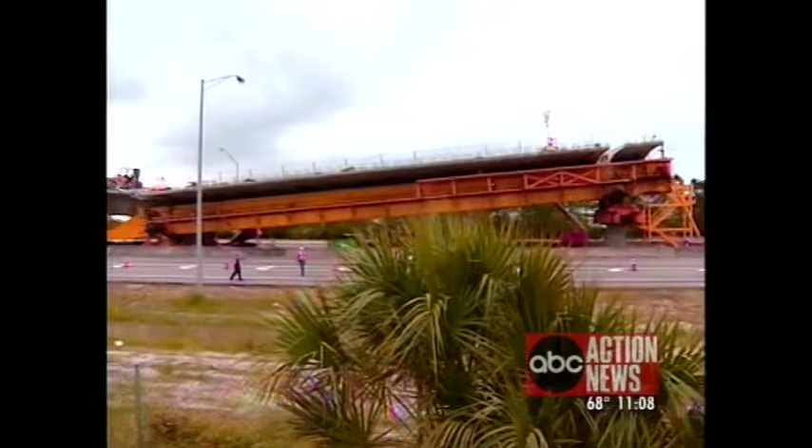The Action News investigators have learned top expressway managers failed to act after their own engineers discovered signs of a sinkhole more than a year ago. Well, tonight we unravel part of the mystery behind the Crosstown collapse. When the collapse of the Crosstown sent tons of concrete and iron crashing down, no one was badly hurt. But the accident shattered the confidence of many commuters. It looks bad. I don't know if I ever want to ride on that bridge.

Within hours of the accident, expressway officials blamed the collapse of Pier 97 on a mysterious sinkhole, an act of God they claimed impossible to predict. I don't know what to call it. I don't like to call it an act of God. But our investigation found that a sinkhole may have been growing there all along, and expressway officials knew about it. Our review of hundreds of engineering documents and field notes tell the real story.

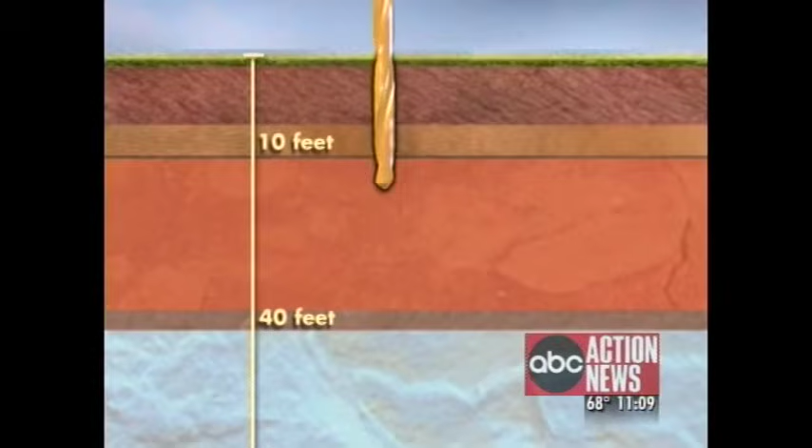Last year, engineers took a soil sample drilling 40 feet underground. They discovered signs of a sinkhole under the area that would support Pier 98, one pier away from the collapse. If it shows soft material there, it would be a concern. Bill McDaniel is the construction manager on the Crosstown project. Records show his engineers reported signs of a sinkhole in their field notes and added reinforcements to Pier 98. But they did nothing to shore up the adjacent piers, including the one that collapsed.

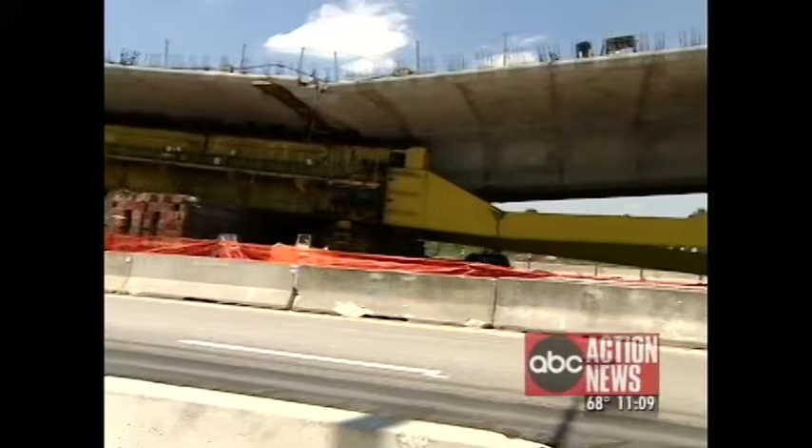McDaniel says he hadn't heard about any of this. I haven't had that brought to my attention. I haven't looked at any of these boring logs or such. I've let the geotech folks review those, bring them to us. They're expert in this area. I'm not. So we had our own experts take a look at the records. Jeff Ellis is an independent environmental engineer who believes expressway officials dropped the ball.

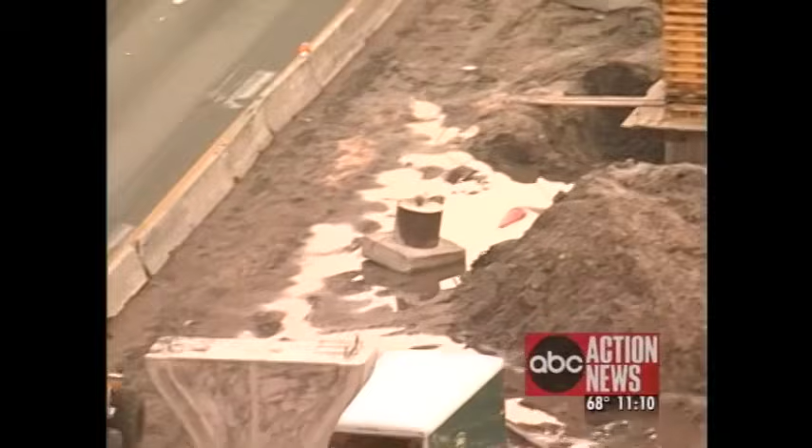If I found a small void like that, I probably would have done some additional testing in the area of this pier. But McDaniel never ordered any additional testing. Crews went ahead constructing Pier 97 with no additional reinforcements. Ellis says it's possible the sinkhole under Pier 98 could have grown, swallowing Pier 97. That could be like a small part of the sinkhole. This soft zone or void could grow into a much larger zone once you move away from this particular spot

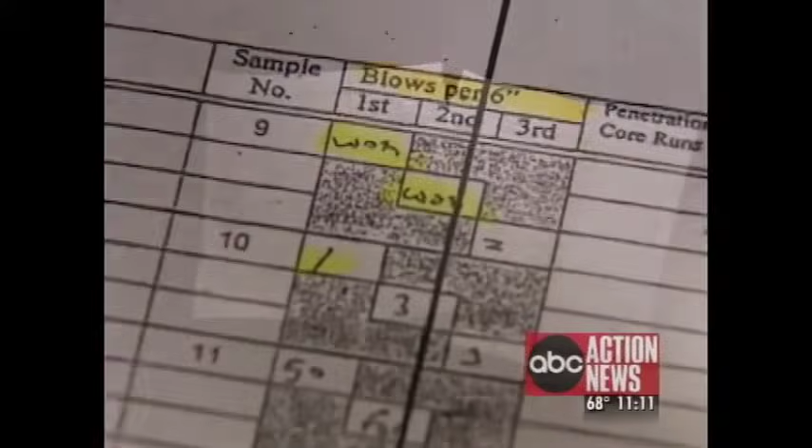the boring was done. Expressway officials admit what we uncovered should have raised red flags a long time ago, but they will not confirm that the sinkhole discovered last year and then ignored could have caused last month's collapse. In the next couple of weeks, the Expressway Authority will conduct soil tests around Pier 97 and 98 to check for more sinkholes. They've decided not to test additional piers on either side because they say that would just be too costly.

Well, tonight, the Action News investigators dug deep on a story that affects thousands of local commuters and taxpayers. Last September, our Mike Mason was the first to report structural problems with the Crosstown Expressway project. Then in April, 7 months after Mike's report, a portion of that expressway collapsed. Before Mike brings us tonight's developments, let's take you back to where it all began.

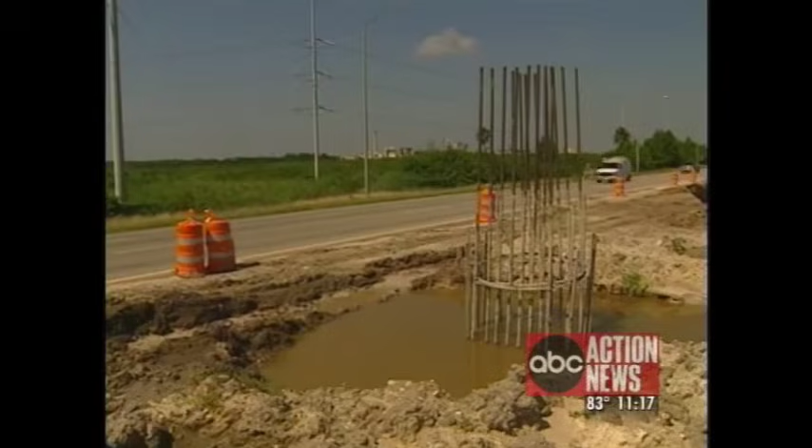September 12th, 2003, an Action News exclusive. We uncover major mistakes in the construction of piers built for the new Crosstown Expressway. Steel rods designed to support the pier were incorrectly measured, leaving the concrete weak in some areas. Expressway officials fired 4 inspectors, including this man, Mark Delashaw. This clearly was careless. I thought it was absolutely a good decision to fire the people involved.

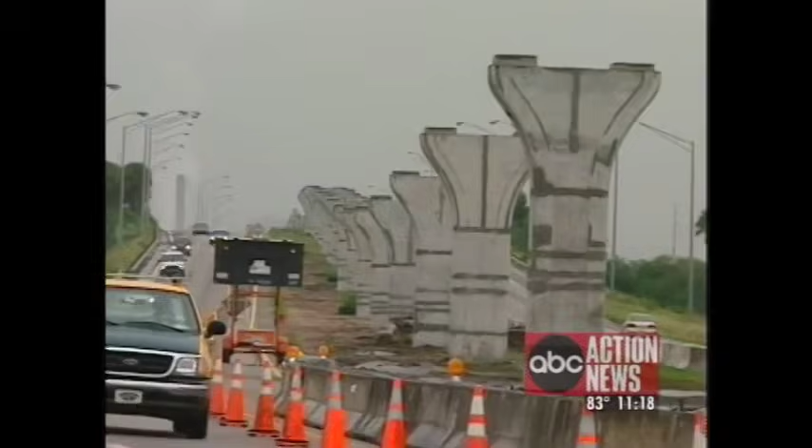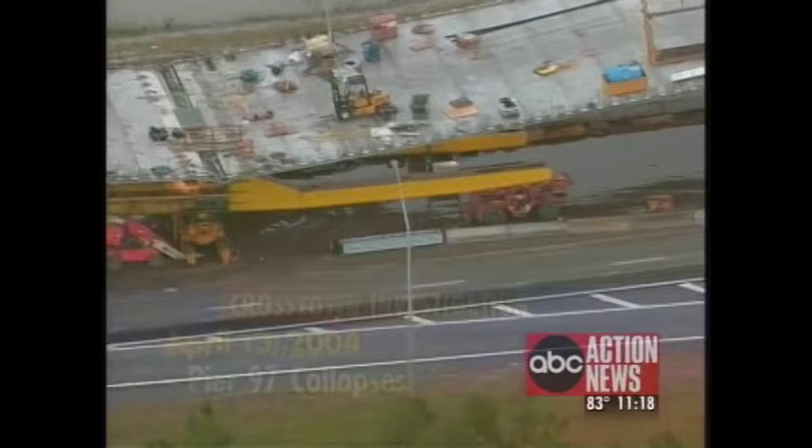In September, company officials downplayed the mistakes, insisting the piers were structurally sound. You're going to guarantee that these are going to be safe? We're very comfortable that these are safe columns. 7 months later, on April 13th, 2004, Pier 97 collapsed. Within hours, expressway officials blamed a sinkhole, dismissing any notion that a structural defect might have caused the pier to collapse. One of our piers actually broke through and entered into a sinkhole.

Well, tonight we have even more evidence questioning the sinkhole theory. In fact, our investigation reveals the same crew of men fired by the Expressway Authority for careless work had their hands all over Pier 97, and they made some serious mistakes while building it. Mike Mason is here now with details. Mike, what'd you find? Well, you know, a lot of people want to know what happened, but at this point, there's really no official cause.

Expressway officials want all of us to believe that a sinkhole swallowed Pier 97, but after months of sophisticated testing, expressway officials have been unable to prove that theory. So now the spotlight is shifting to the structural integrity of those piers and the qualifications of the people who built them.

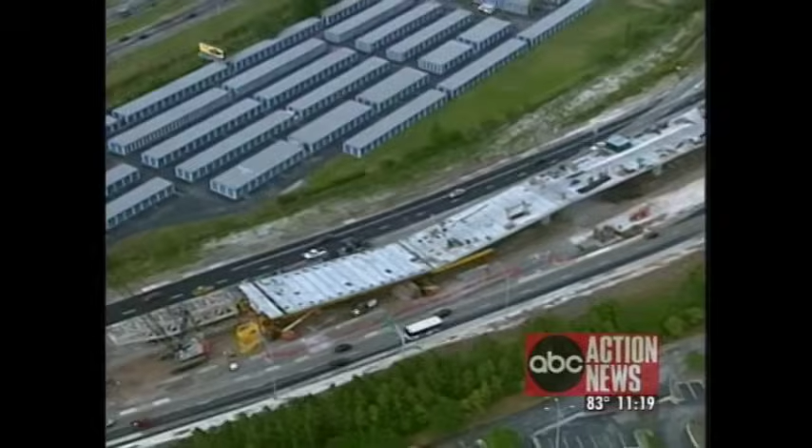The Expressway Authority says it won't really know what happened to Pier 97 until they pull it out of the ground. But while they wait, we've been digging through records, finding evidence of problems with how the pier was constructed. Last summer, construction company URS began digging a hole for Pier 97's foundation, or shaft. Records show it didn't take long before the shaft began to get crooked.

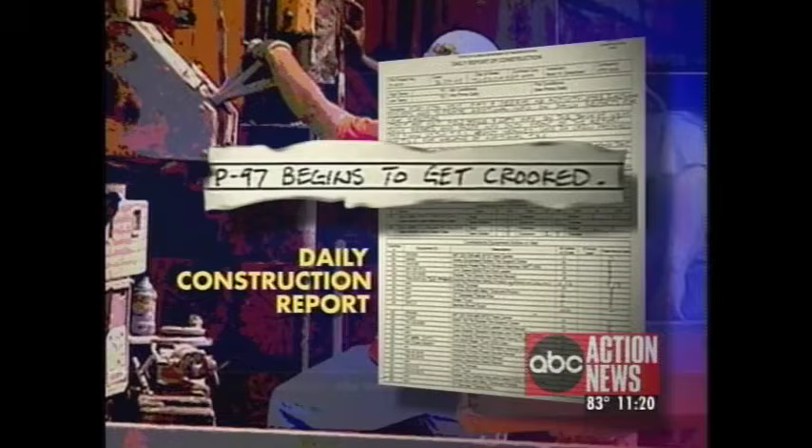Independent engineer Joe Robinson says that could cause major weaknesses in the bridge's support. And the shaft is supposed to be 90 degrees straight down by design, and you have it crooked, then you're not going to have the strength in that pier as you would if it was constructed properly. Workers at URS say they straightened out the shaft, but there's no way to know exactly what they did to straighten it out, or if they even did any work at all. That's because there are no reports of the repairs to back it up.

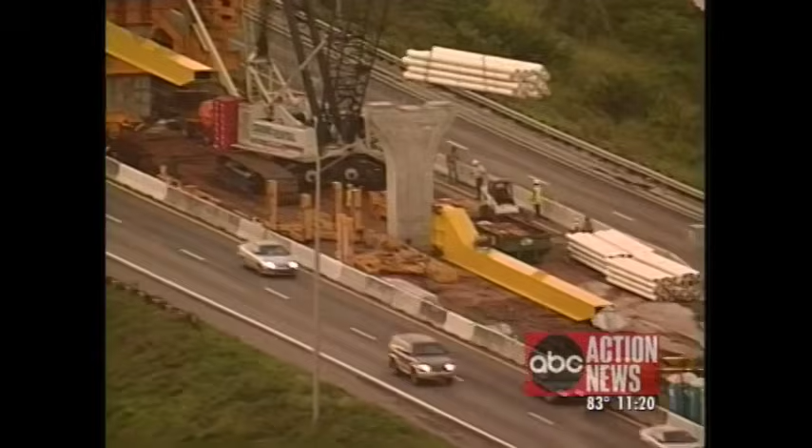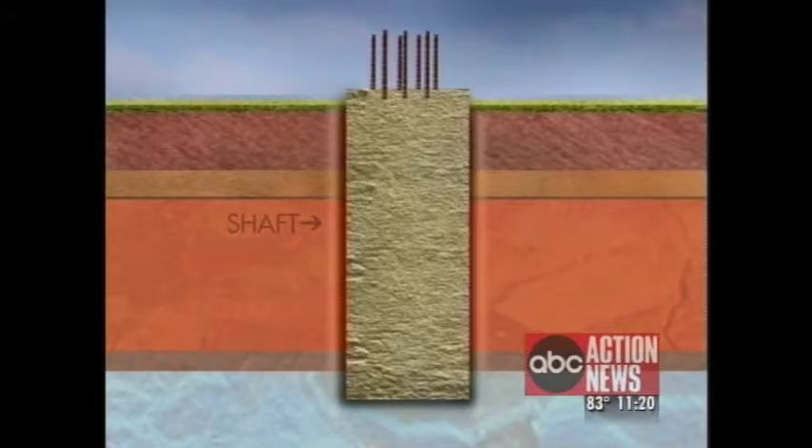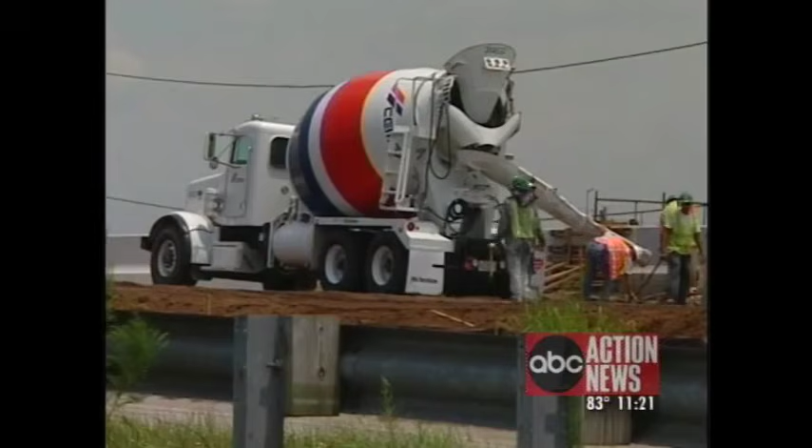We also discovered when workers poured the concrete for the foundation, they had to pour in a lot more than anyone expected. It made us wonder, was the shaft still crooked, requiring more concrete to fill it up? So how much concrete are we really talking about here? Well, it's 6 cubic yards, and this is what 6 cubic yards looks like. It's enough to fill 27 of these wheelbarrows. So the question now is, where did all that concrete go? URS says overpouring concrete is common practice, but our independent engineer says 6 cubic yards is way too much.

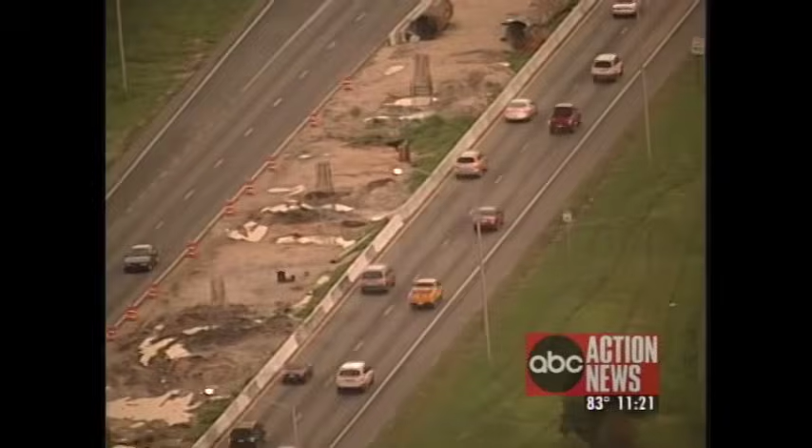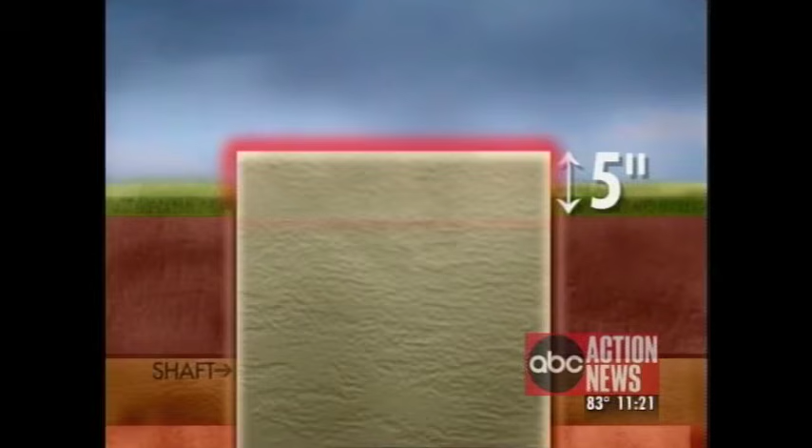And we found yet another problem. After the concrete was poured, URS workers realized they had built the shaft 5 inches too high. Just a few inches off and the whole project could be compromised. The company claims it fixed the shaft, but again, we can't tell you what they actually did because nobody kept any repair records. Engineer Joe Robinson says that's a big problem. And it should be reviewed by an engineer. If you're wondering why repair records are not being kept at such a huge construction project, well, so are we.

The contract URS signed with the Expressway Authority requires them to keep a written record of all deficiencies noted in the work of the contractors, and they must document the corrective action that was taken. URS's local vice president, Bill McDaniel, refused to explain why records of the mistakes made on the shaft were never kept. Instead, McDaniel told us to talk to the Expressway Authority. They had us speak with their consultant, Harold Aldrich. Aldrich says we're making a big deal out of nothing. There's absolutely nothing that would suggest that anything you're asking about had anything to do with this pier falling down. This is a wild goose chase, Mike.

Aldrich may call it a wild goose chase, but our investigation found even more problems with basic record keeping. Aldrich attended weekly construction meetings, but he couldn't explain why these daily inspection reports were never signed by an engineer. This is a huge construction project involving thousands of people. That a particular piece of paper didn't have a signature on it isn't necessarily in itself meaningful. But it's more than just one piece of paper. We're talking about repair records that don't exist and dozens of construction reports that were never signed by an engineer. I want to stress that the engineer isn't signing off and dating these construction reports, and that's crucial.

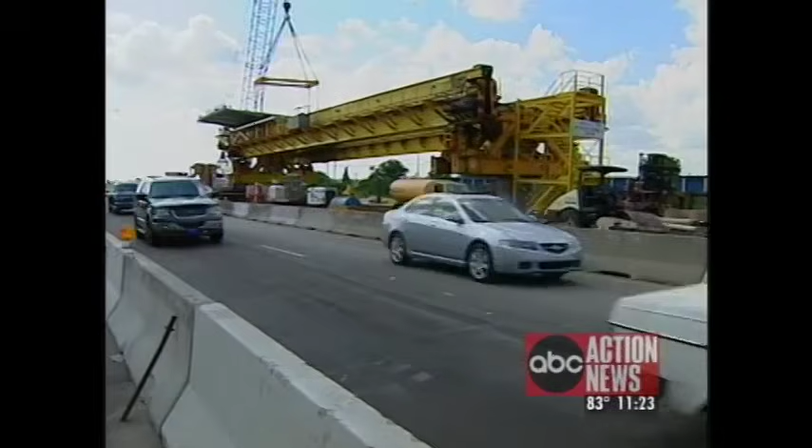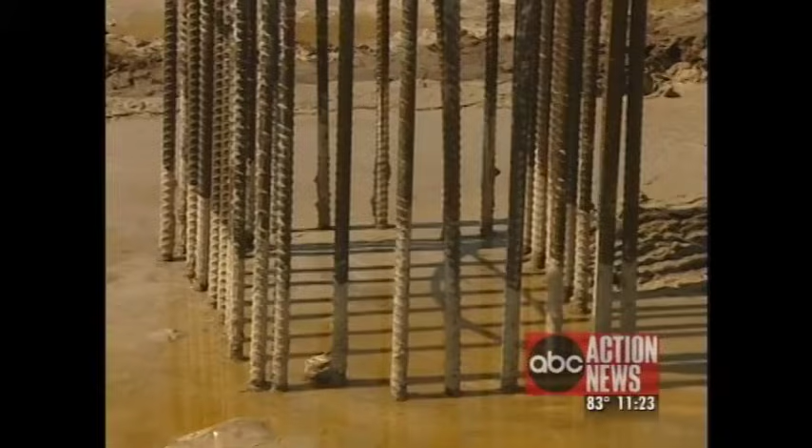Instead of relying on an engineer to ensure the safety of the expressway, an expressway that will carry thousands of commuters each day, URS relied on this man, Mark De La Shaw. De La Shaw inspected the foundations of all the piers, including Pier 97. Is there a need to send an engineer out to take a look at it? Those are engineers that are inspecting it. Mark De La Shaw was an engineer? Yes, is an engineer. Truth is, De La Shaw has no engineering license at all. Aldrich later apologized for the mistake and admitted De La Shaw is not an engineer.

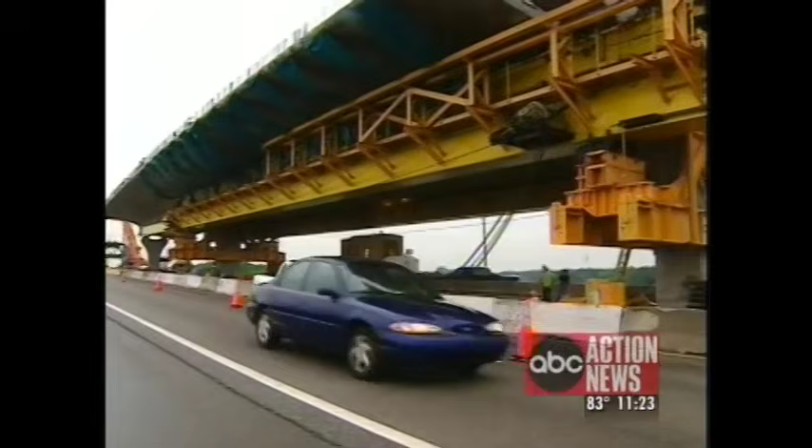Fact is, De La Shaw has a history of getting things wrong. Last summer, URS fired De La Shaw for failing to notice a major design flaw in the foundations of more than 40 piers. But as an inspector, you should be inspecting these things, right? Oh, yeah, and... Despite all the mistakes and all the missing repair records, De La Shaw and his crew put Pier 97 into the ground. It stayed right where it was until the day it came tumbling down.

Nobody really monitors documents until something occurs. People only get involved or only worry about documentation after the fact.

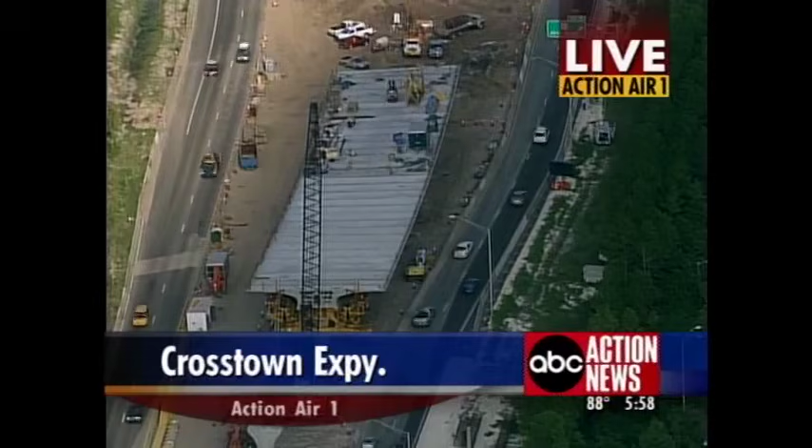Another pier on the Crosstown Expressway expansion project is sinking. Tonight, the project is shut down, and engineers are scrambling to fix it. We have live team coverage from the air and on the ground.

Good evening, everyone. I'm Wendy Ryan. And I'm Brendan McLaughlin. We start with this Action News exclusive we first brought you at 5, and we kick off our team coverage with Chris Martinez live at the scene of this partial collapse. And Chris, must be very disappointing to commuters who have been looking forward to the completion of this. Absolutely. They're very worried to hear this is happening again.

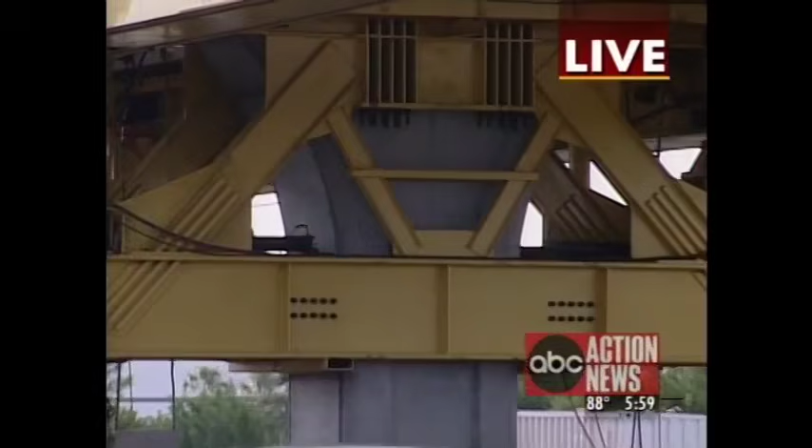The problem this time around is with Pier 99. It is just 2 piers down from the one that collapsed 3 months ago today. Now, right now, you can see this pier is roped off. The problem was discovered as part of the bridge was being loaded on top. Tonight, engineers are trying to figure out exactly what's wrong and how to fix it.

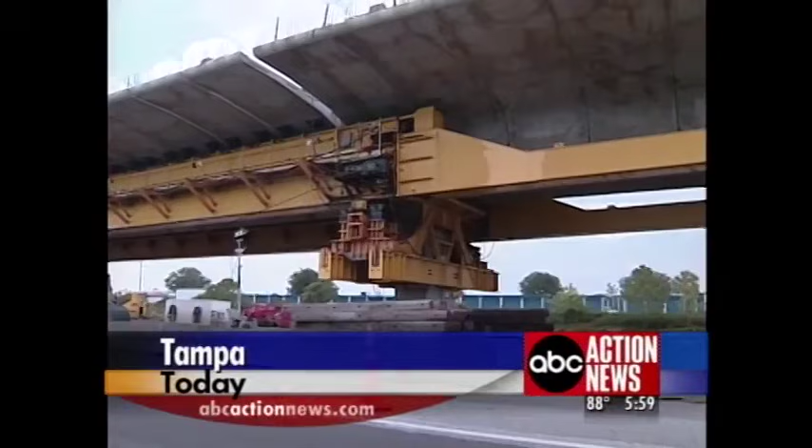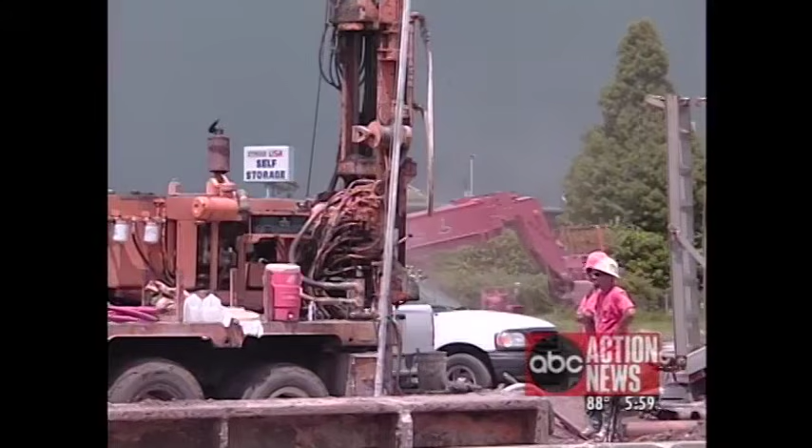According to PCL workers, this latest problem was discovered over a week ago. They say Pier 99 has sunk down into the ground at least 3 inches. Construction here has been brought to a standstill. This was serious from day one. The Expressway Authority believes the problem with Pier 99 isn't structural, but rather in the ground. They say they've started extensive testing of the ground around the pier to figure out the cause and find a solution.

We're going to look at probably ways that we can stop it from sinking further, bringing it back up. Again, I'm speculating, to be honest with you. I leave that to the technical engineers to tell me what the plan will be. The Expressway Authority is confident they'll fix the problem, whatever it is. In fact, they say they guarantee this bridge won't open unless it's safe.

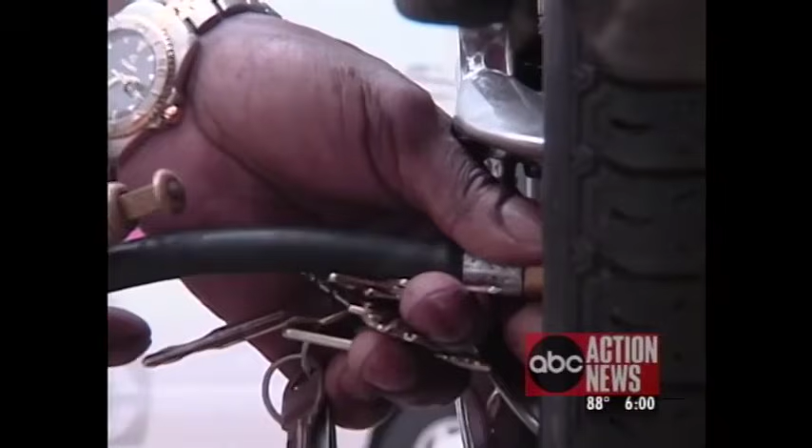But that guarantee isn't good enough for everyone. How can you guarantee it? How can you? Because they was building it like they guaranteed their safety the first time. Curtis Marshall uses the Crosstown at least 3 times a week. Now he doesn't think he'll use the new addition at all. When you look at the structure, you can see what kind of catastrophe it can cause.

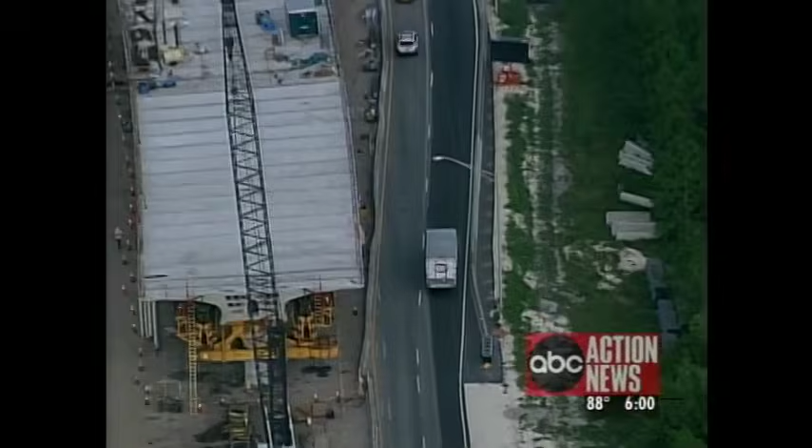And right now you're taking a live look at the Crosstown Expressway from Action Air 1, and you can see traffic so far not affected by this latest problem. The results from the tests of the ground should be ready, we're told, in about 3 weeks, and we are also told extensive testing of the ground around every pier, all 213 of them, will now get underway to look for any more potential problems.

We're live along the Crosstown. I'm Chris Martinez, ABC Action News. They might be afraid of what they find. Thank you, Chris Martinez, for that live report.

Wendy? Today's latest problem comes just 4 days after our Mike Mason uncovered construction mistakes in the pier that collapsed back in April. Today, Mike went digging for more answers. And Mike, I know you spoke with Expressway officials and bridge experts. How are they planning to fix this multi-million-dollar project? There's a lot of questions up in the air. I mean, this project has been plagued with plenty of problems already. This is just a public relations nightmare for them.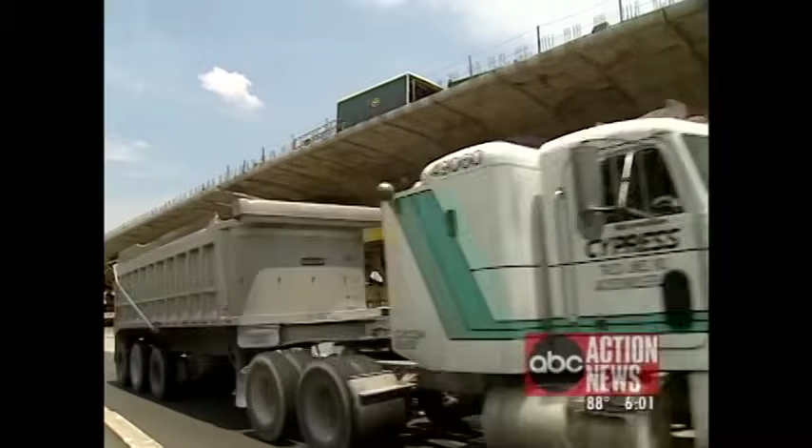So far, we've uncovered 2 major problems with the Crosstown Expressway: structural mistakes with the piers and the soft soil underneath them. Addressing these problems will be difficult, but it may be even harder for officials to restore public confidence. Expressway officials are not taking any chances after discovering the problems at Pier 99. The entire Crosstown project was immediately ground to a halt. We have stopped work because of the special things that have happened at Pier 99. We're erring on the side of caution, and we're stopping.

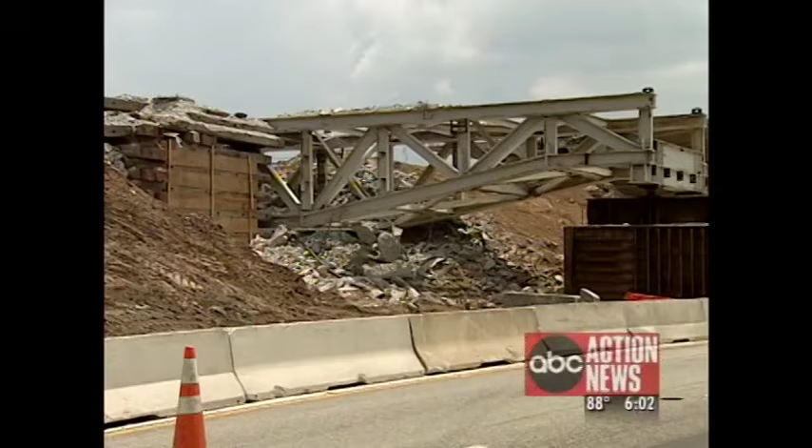The collapsed Pier 97 is still in the ground. Nearby, Pier 99 is roped off. You're not even supposed to be here, though. That's really the whole thing. Construction crews have told us to stay away from Pier 99, and for good reason. They say it has sunk 3 inches. Expressway officials say it's 1.5 inches, but one thing is clear: this pier is under a lot of pressure, and it could continue sinking at any time.

Our own investigation found soil experts discovered signs of a sinkhole under the area that would support Pier 98, the pier between 97 and 99. Reinforcements were added to Pier 98, but nothing was done to strengthen the surrounding piers.

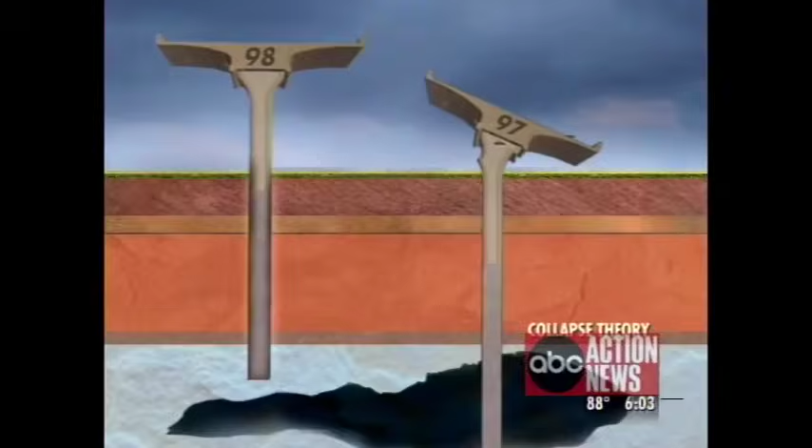If I found a small void like that, I probably would have done some additional testing in the area of this pier. Independent expert Jeff Eller says it's possible the sinkhole under Pier 98 could have grown, swallowing Pier 97 and now Pier 99. So did the Expressway soil engineers overlook crucial information showing the ground was too soft to build this bridge? We discovered soil engineers failed to sign off on many reports as required.

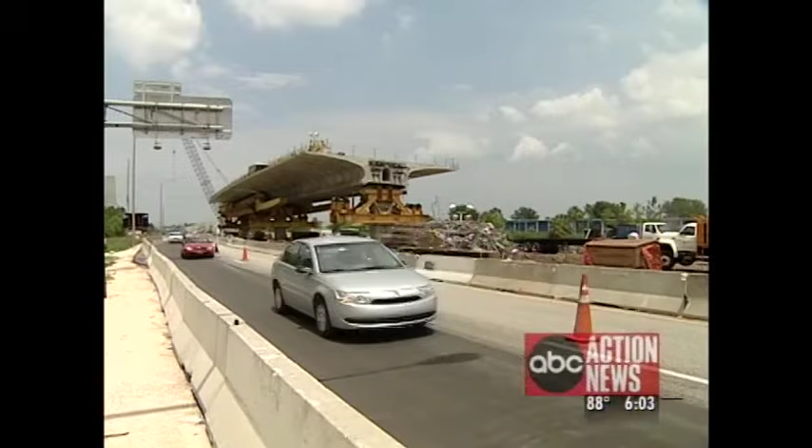So we asked Bill Bracken, a bridge designer, an expert on bridge accidents, what needs to be done to keep this project safe for the public. The foundation engineer needs to figure out why it dropped or why they are dropping. The bridge engineer then needs to take a look at the bridge to decide what impact that drop has on the bridge itself. And this afternoon, Wendy, we did speak with PCL.

That is the company that is the general contractor on this project. Gary Harder is the head of that company. He says the latest sinking pier is not a structural issue at all. He says the focus is now on testing the soil around every pier on the project. So it looks like he may be pointing fingers a little bit at the geotechs, the soil engineers on this project. They're looking at the ground underneath the piers. He says it's nothing to do with what we did. It's not the structure.

Mike Mason found even more problems with the piers that support that enormous roadway project. Mike, what's the new information? Well, expressway officials are now saying that they've made this big discovery. They say they've found soft ground underneath several piers, but we've discovered more soft ground under more piers, and this should not be a big surprise to any expressway official because this report right here shows they've known about all of this stuff for 3 years.

We don't try to make a bridge that's going to collapse. That just wouldn't make sense. Expressway officials say they did everything possible to keep the crosstown safe. But this report, written in 2001, raises serious questions. It shows how engineers tested the soil beneath every pier and found soft clay beneath many of them. The ground below Pier 106 was full of soft, sandy clay. Workers had to dig 147 feet before they hit solid rock.

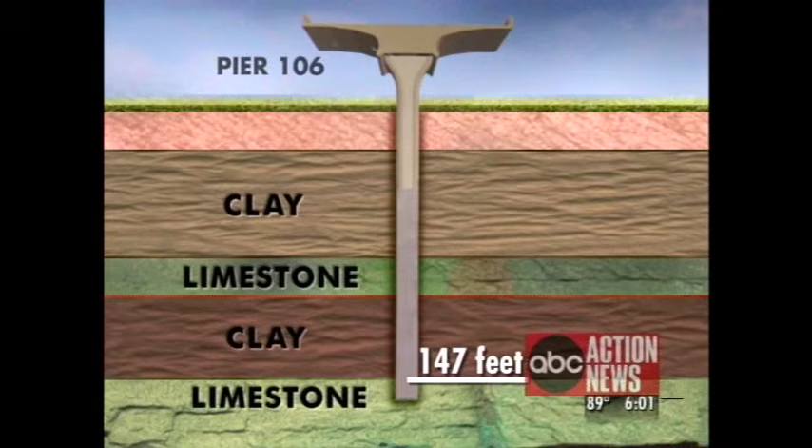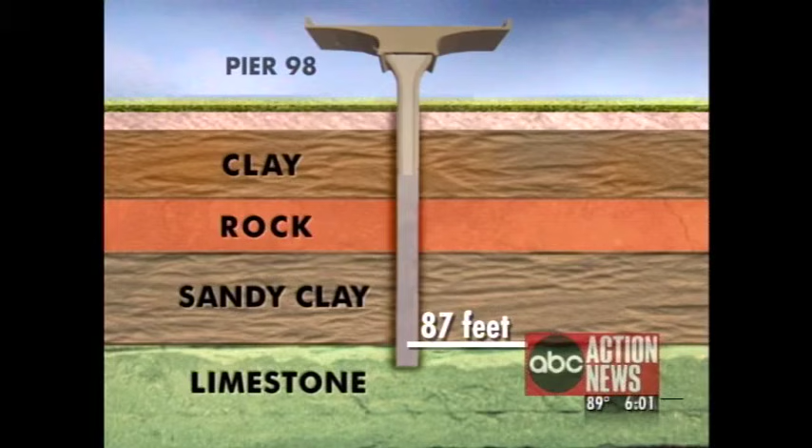Now look at Pier 98. Experts found layers of clay and soft rock. They finally found solid limestone at 87 feet. Soil expert Jeff Eller says the soft zone around these piers could be a problem. Would this soft zone raise a red flag in your mind? It would be a concern. It definitely would make me investigate the area a little more, yes. But instead of investigating alternatives, expressway officials built other piers in the same area, including Piers 97 and 99.

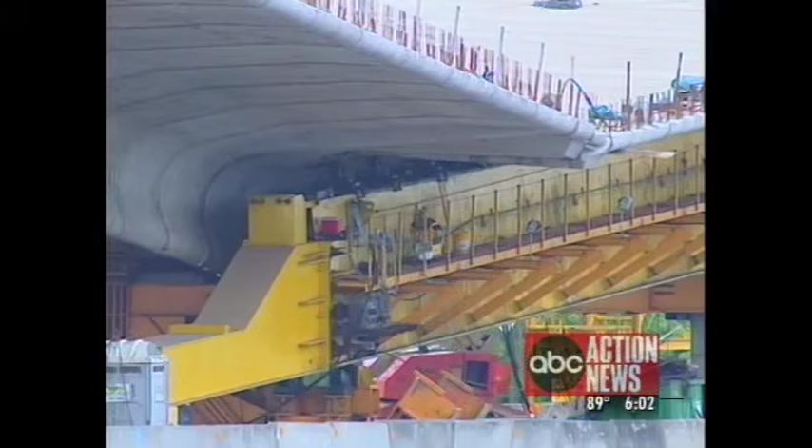Last week, expressway officials downplayed the issue. There's absolutely nothing that would suggest that anything you're asking about had anything to do with this pier falling down. This is a wild goose chase, Mike. This week, officials changed their tune. It is a major problem. We're working on this problem right now. And expressway officials are also changing their story when it comes to the collapse of Pier 97. When it sank 20 feet in the ground back in April, they quickly blamed it on a sinkhole. One of our piers actually broke through and entered into a sinkhole.

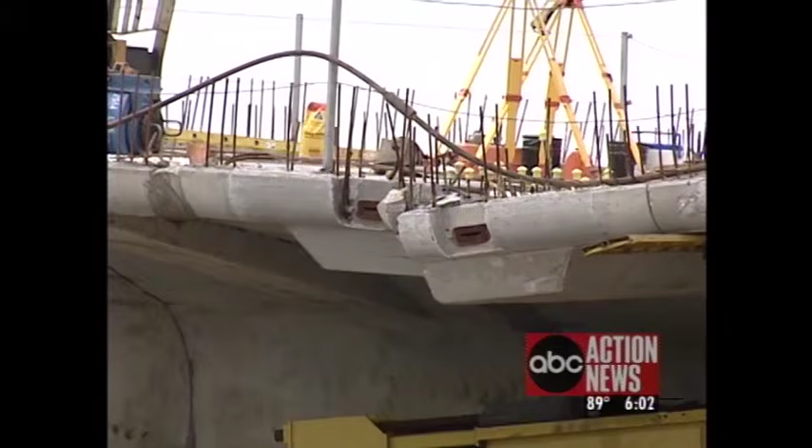Now they have a different story. At this point, we're not saying a sinkhole, but we do have an extreme geological condition. You said sinkhole before, though. What we first saw and the way it acted initially, and again, we said this many times even before, we're speculating because we aren't geotechs. Perry Don Brown says they're now done speculating, and soft earth is what caused 97 to collapse.

So why didn't anyone notice this until now? Well, at the time, we didn't know that we had those special geological conditions. At the time that we were doing it, they looked like they were just the same conditions throughout the project. It did look the same. But what about that report back in 2001? The answers may have been there all along.

Expressway officials say they will be doing additional soil testing near Piers 97 and 99, but they have not committed to testing the ground in other areas. They do plan to double-check all of the piers, though, to see if they show signs of sinking. And there are 213 piers, so of course that's going to be a lot of work. Well, Mike, I'm not an engineer, of course, but it seems like a sinkhole would be good news because it would imply a limited, isolated area, whereas soft ground could affect the whole project.

Sure, and the difference between a sinkhole and soft earth is that a sinkhole opens up and it can grow. So, you know, if it's soft earth, that means it could be anywhere along this expressway, and it also affects the insurance claim because they had already filed a sinkhole insurance claim. So they say that they do have an alternative to filing a claim, some other sort of claim for damages, but not a sinkhole claim for sure.

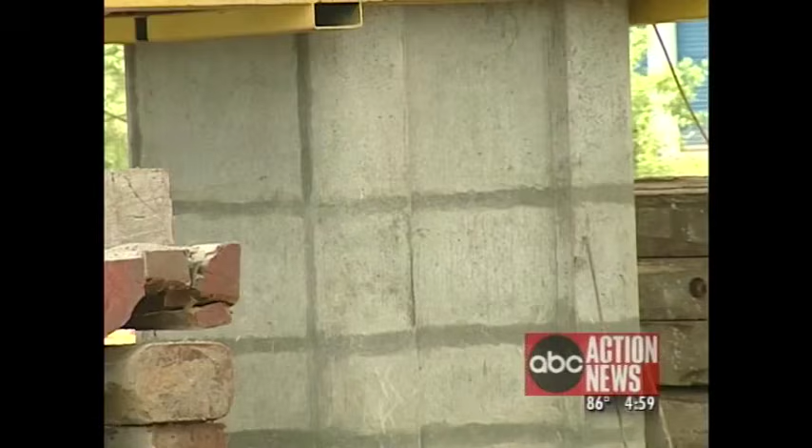David says Pier 99 first began sinking at the end of June, when workers loaded it up with huge segments of the bridge. They put 2 spans up, which is 16 segments on each span, and when they put the second span on, which is approximately 3 million pounds of concrete, they noticed that it sank a few inches. David says work on the bridge stopped immediately. And after the 4th of July weekend, he says PCL officials quickly called an emergency meeting. They said it was still sinking.

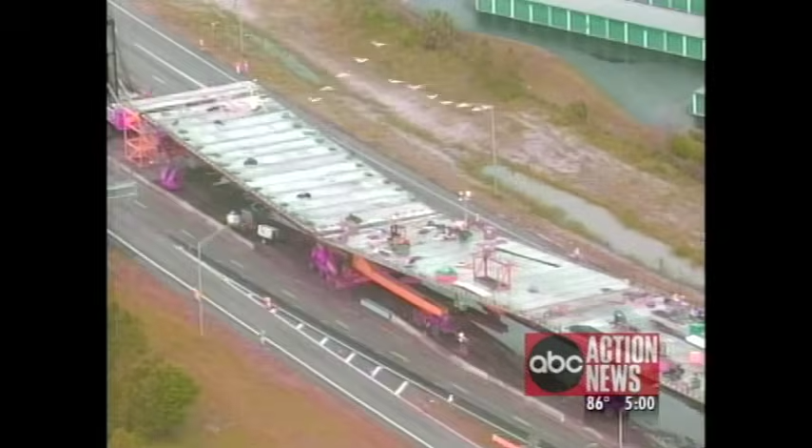David now stays far away from Pier 99. He learned his lesson the first time when Pier 97 sank last April. He was right there when it collapsed. Pieces of concrete fall into the highway, and you heard loud bangs, I guess, from the concrete coming down. Besides collapsing piers, David has also witnessed major mistakes during construction. That's why he now wants to warn the public before it's too late. If they fix those 2 piers right now and put a bridge on top of it, would you drive on the Crosstown Expressway today? No, not yet. Not until they check the other piers out.

Tonight at 11, our exclusive whistleblower interview continues. David tells us more about the problems beyond just the 2 sinking piers, and David says the actual bridge itself could be flawed. We'll show you the evidence tonight at 11. Well, at the very least, we're looking at major delays, probably major cost overruns. At what point will the taxpayers be on the hook for this, Mike? Well, that's a good question. They say they're going to make it up in toll money, but a lot of the money came in the form of a bond from DOT, so it's interesting to see if that's really going to meet what we need to come up with for this extra expense. Could be an enormous amount of money.

Yeah. Absolutely. Tonight, new information about what caused the Leroy Selmon Crosstown Expressway to collapse. Board members lashed out tonight about the way the whole thing was handled. Our own Mike Mason was the one to first expose this problem with the Crosstown last year, and here with an update. What do you got, Mike? Right. Well, tonight's committee meeting was designed to help answer some questions. It did that, but it also raised some at the same time. So far, we know that Pier 97 has collapsed and Pier 99 sank more than an inch. Tonight, Expressway board members wanted to know if this could have been prevented. They were told maybe, but it would have required more testing and more money.

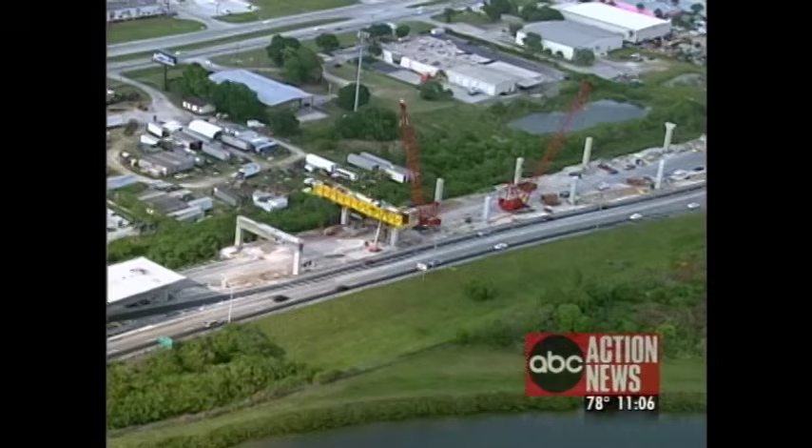The Expressway's executive director, Pat McHugh, wants his board members and the public to know he's doing everything he can to keep the Crosstown safe. This is our bridge. We're spending $350 million on it, and we will see to it it's built properly. But board member Thomas Scott is not so convinced. Scott is also a Hillsborough County commissioner.

The credibility and the structure of the pier right now is being questioned by a lot of people. I think you know that. Scott claims Expressway officials never notified him when Pier 99 began to sink. He and the general public only found out after Action News broke the story. That should have happened, and if it did not, I apologize for that and assure you that that is not.

Let me just say, I understand, I respect that, but I haven't been notified as of today. The only reason I got about it is because Channel 28 came out, wanted to do the interview, and I had my office call your office, and I talked to somebody at that point. That's unacceptable. Okay. Commissioner, with all due respect, I was advised by your staff that you were on vacation, which is why we did not have direct contact with you.

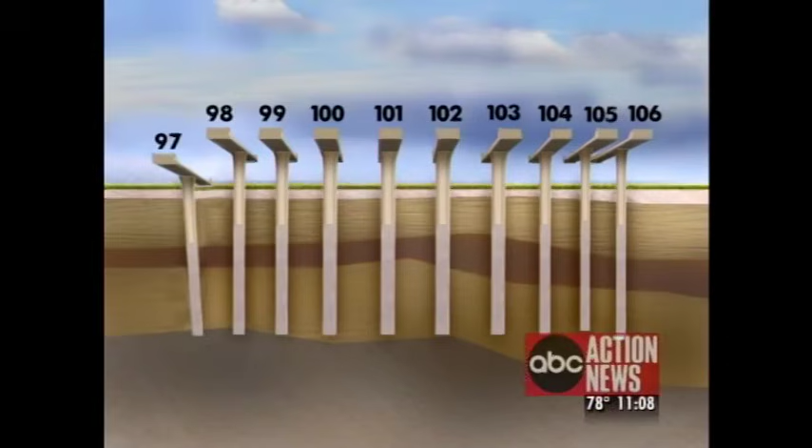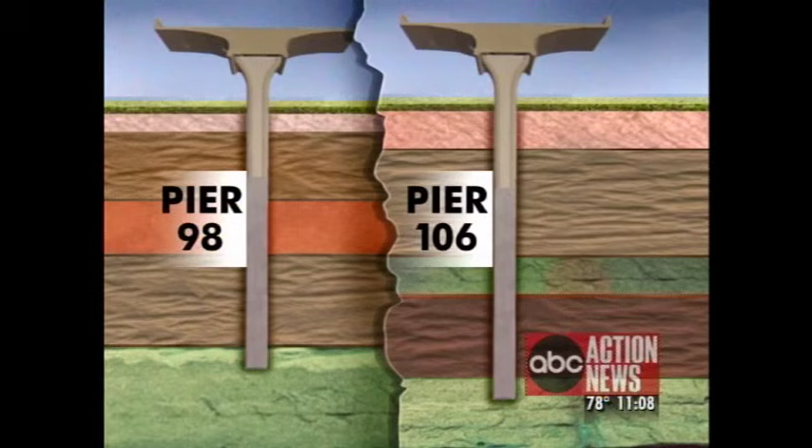Board members also questioned whether more piers could begin sinking. In 2001, soil experts found soft ground below several other piers, but they never did any extensive testing. It was known that soft materials existed in these areas, so why didn't we address this at that time years ago? It's not a question of knowing that the soft material is there. It's a question of finding the strong material and building on it.

McHugh now seems to be changing his tune now that Pier 99 has also shown signs of sinking. Although the pier is founded in rock, that immediately adjacent to it is this soft material, and that's scary. McHugh now promises to keep all board members fully informed. He also estimates that repairing piers 97 and 99 will cost $11 million. Additional ground testing on the project will cost another $3 million. But it's what's needed right now to ensure that this thing is going to be done properly.

You see, the problem is there are holes all through this project, and they were only testing the ground underneath the exact pier. So if they had done testing near the pier, they probably would have seen the problem. Well, was that taking a shortcut, or would it have been standard procedure to take more test holes? Well, that's a strange thing. Expressway officials say that it is standard just to do one test below every pier, but the DOT official at tonight's meeting said, I want you to show me where these standards are spelled out, because he wasn't even sure if those were DOT standards or not.

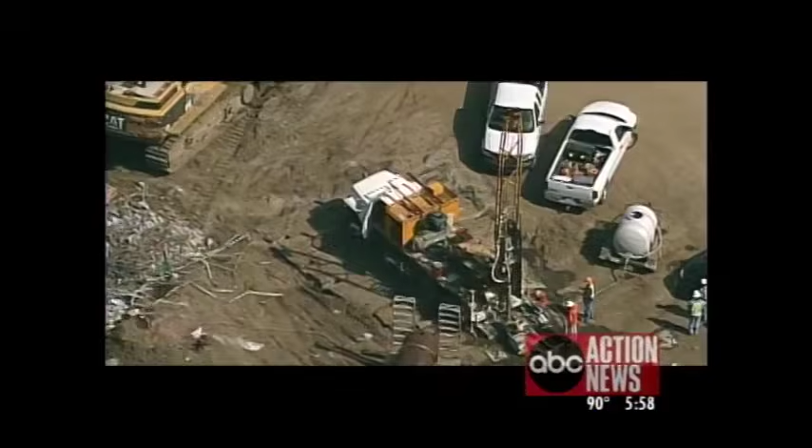Action News was the first to expose numerous construction problems in the Crosstown project. Now the Expressway Authority is admitting the project is in jeopardy. Our team coverage, including reaction from decision makers and drivers, starts right now.

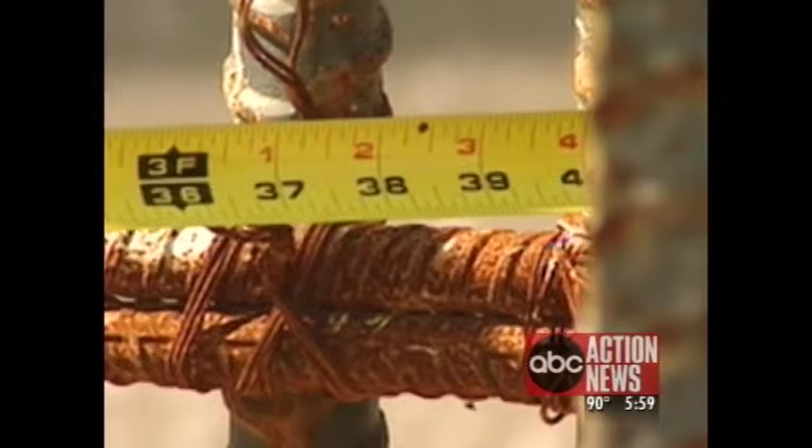After months of denials, the Expressway Authority now concedes this project has serious structural and design flaws. It's something we've been reporting for nearly a year, and today the outrage is growing as we uncover how the people in charge could have prevented this entire mess. Most of the foundations are found to be seriously flawed in their design. The Expressway Authority claims this latest development is a total shock. But we've been reporting signs of trouble since last September. Problems Expressway officials knew all about all along.

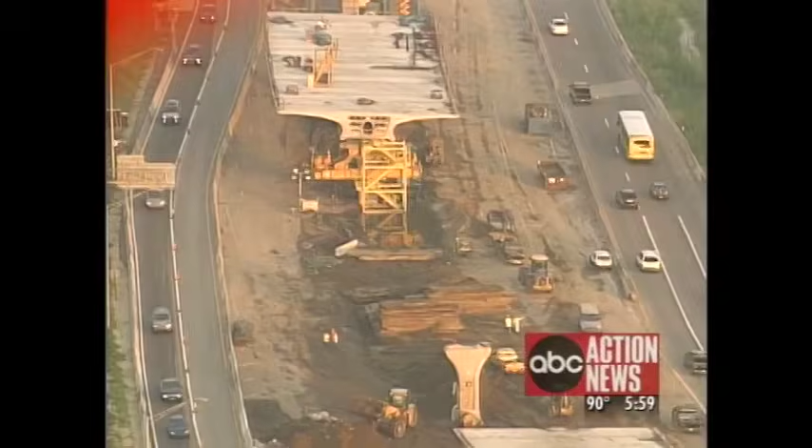Now they're blaming general engineering consultant URS for this latest mistake. We tried to speak with URS's local manager, Bill McDaniel, after a recent board meeting. Let me just show you a couple of things that I found. Doesn't matter, Mike. Records show McDaniel knew about the flaws with the pier's foundations more than a year ago, but so did Expressway officials. In June of 2003, engineers discussed problems with the foundation for Pier 92. The steel cage inside was damaged and twisted up. McDaniel said a structural engineer will need to sign off on that.

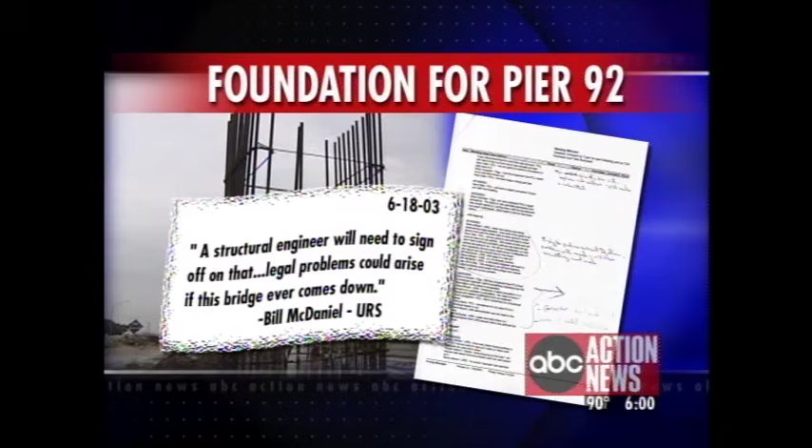Legal problems could arise if this bridge ever comes down. We asked Bill Bracken to weigh in. He's a forensic engineer who investigates accidents like this one. How do I find out if a structural engineer really did sign off on that? There should be paperwork to that effect. But we found no paperwork to show engineers had signed off on any key reports. And as you know, the bridge did come down on April 13th when Pier 97 collapsed.

During a construction meeting on July 9th, 2003, one URS engineer announced, I have information here indicating that Pier 97 was not built within specifications. I would hope that with these problems that you say they encountered on 92 and 97, those problems should have dictated that the engineer go back in and take a look at it. I would have hoped that they would have caught any substantial flaws at that point in time by going back in and reevaluating their work. But like these foundation flaws? I would say yes.

Expressway officials say they will now test each and every pier and do whatever it takes to make repairs, but it may be even more difficult to restore public confidence at this point. Pat McHugh is the Expressway's executive director. He's in charge of building the biggest bridge project in Tampa Bay. Tonight, he's accused of posing as a professional engineer, even though he doesn't even hold a license.

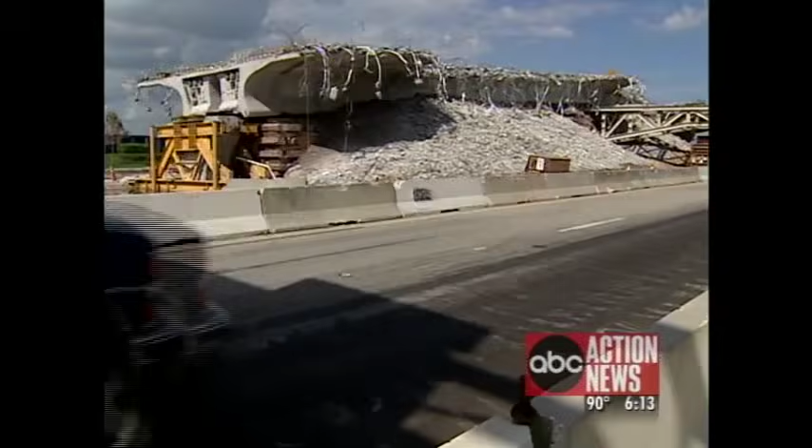Today, for the first time, we have facts. Pat McHugh is the leader of the Tampa-Hillsborough County Expressway Authority. He's in charge of hundreds of millions of dollars in highway funds. When McHugh was hired as executive director back in 1996, he held a professional engineering license. But we've discovered that license is now null and void. In fact, McHugh's license expired on February 28, 1999, more than 5 years ago, years before the now troubled expressway expansion project even began.

What? He's not a professional engineer? No. I thought that he was a professional engineer. Everything I seen his name on had PE behind it. Consulting engineer Joe Robinson and many others who have been following the Crosstown project assumed that McHugh was a licensed professional engineer. After all, McHugh's business cards boast his PE or professional engineer title. Expressway Bob Clark was also duped by the misleading card. I knew that he had it on his card, so yeah, I assumed he was a PE.

A lot of people had good reason to think McHugh held an engineer's license. We found example after example of publications that refer to McHugh as a professional engineer. McHugh has repeatedly been listed as a professional engineer on the Expressway Authority's own website. Their 2002 annual report featured him as Pat McHugh, PE. A July 2004 newsletter about bridge technology features McHugh and refers to him as PE. The Worldwide Toll Operators Association has McHugh listed as a professional engineer. We found many more references to Pat McHugh with the title of professional engineer, each and every one published long after his license had expired.

Can you tell me why you maintained the title of professional engineer, even though you did not have a license? It's not a true statement. Excuse me. McHugh later emailed this statement saying, "I have never represented that I perform engineering functions for this agency. Those functions are performed by the authority's chief engineer and the engineering firms that report to him." But remember, McHugh has listed himself as an engineer on publications and even on the agency's own website.

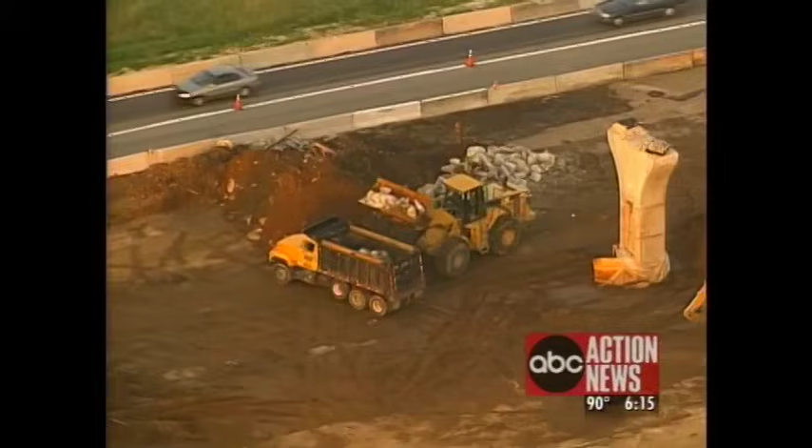The Board of Professional Engineers requires continuing education courses for engineers to maintain their license, and Florida law is clear. It says a person may not use the name or title professional engineer or any words or letters tending to indicate that person holds an active license as an engineer when the person is not licensed. Our investigation reveals Pat McHugh is violating the law and could be charged with a first-degree misdemeanor. Joe Robinson feels McHugh deceived the public, and with the credibility of the entire Crosstown project already on shaky ground, he wonders if Pat McHugh's actions were part of the problem. I mean, this may be part of the reason that we had a failed bridge.

If he was a professional engineer, there's a certain amount of ethics and a certain amount of technical expertise that you must maintain. Florida's Board of Professional Engineers will now send Pat McHugh a cease and desist order like this one, warning him to stop using the title of professional engineer.

In the past hour, Pat McHugh emailed us this statement. In it, he blames his staff members for incorrectly printing documents with the PE designation on them. And he says for the past 5 years, he was not aware there was a PE on his own business card. Back to you. All right, thank you, Mike.

New details tonight: Governor Jeb Bush is weighing in on problems with the Crosstown Expressway. We caught up with Mr. Bush at a news conference in Bartow this afternoon and asked how he feels about the Crosstown's executive director, Pat McHugh. If a road has got that much overrun and those kind of flaws, then it calls into question the management unless there's some problem with the consultants or the engineer.

Now, Governor Bush says he will investigate the Crosstown situation when the threat of all these hurricanes is no longer an issue. Meanwhile, public confidence is fading in the Expressway Authority's ability to pay its debts. Now, in August, investigator Mike Mason reported on serious design flaws in the project, and tonight he's uncovered mounting financial problems at the Expressway Authority.

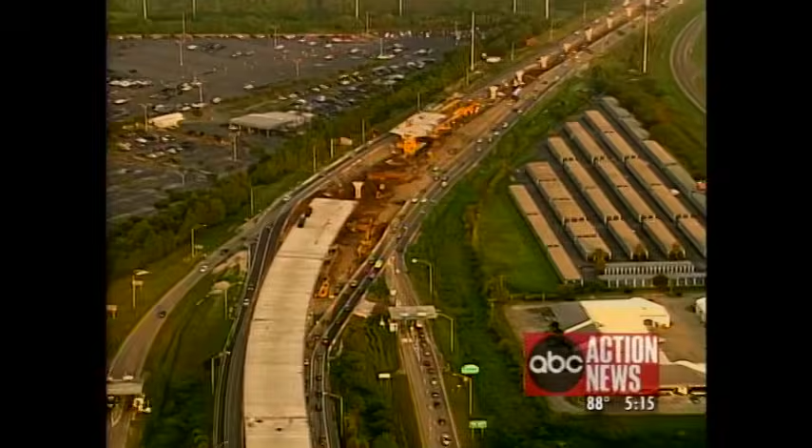This whole Crosstown mess is costing big bucks. You have the overhead costs, which are roughly $11,000 per day. Construction along the Crosstown stopped in July after Pier 99 began to sink. Before that, Pier 97 sank. And now consulting engineer Joe Robinson worries taxpayers may be stuck with the bill. Because the taxpayers' money is probably being wasted, and if we have to do any kind of remedial action, it's going to be in the millions.

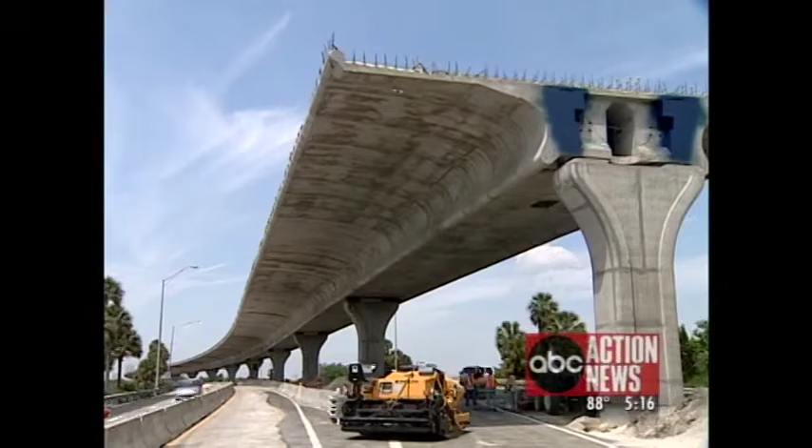Robinson has reason to worry. Florida's Department of Transportation has loaned the Expressway Authority millions in taxpayer dollars. The authority now owes the state more than $153 million. $101 million of that has to be repaid by next June. That's only 9 months away, and right now the Expressway Authority has not even paid back a penny.

But take a look. This is obviously still being built, and that's why some taxpayers feel this will all fall right back on them. So taxpayers are going to be stuck with this regardless. Expressway officials are now negotiating with DOT, asking for more time to repay their debt. Meanwhile, this is all news to Bill Bracken. He's a bridge engineer who has worked on a number of DOT projects. He had no idea taxpayer money was even being used to build this bridge. I had no idea that the DOT had funded this project in excess of $150 million.

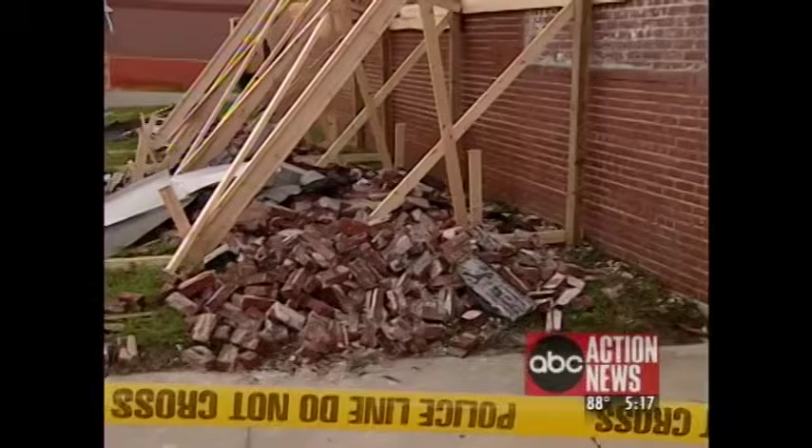Bracken is the man state officials call to assess structural damage after a hurricane hits. He hopes taxpayers won't be hit with bailing out the Crosstown. After all, it's one disaster that could have been prevented. It's disappointing to me as someone who's done work recently in the Punta Gorda area and more recently in the Pensacola area, to think what those two areas could do with $150 million. The fact that it's gone into this project is a little upsetting.

The Expressway Authority will have to sell bonds to pay back some of their DOT loans, but financial consultants say all of the construction problems with the Crosstown could result in a lower bond rating, and selling those bonds to investors won't be easy. Crews are now scrambling to make emergency repairs to yet another pier. At the same time, the Department of Transportation seems to be gaining control of the project.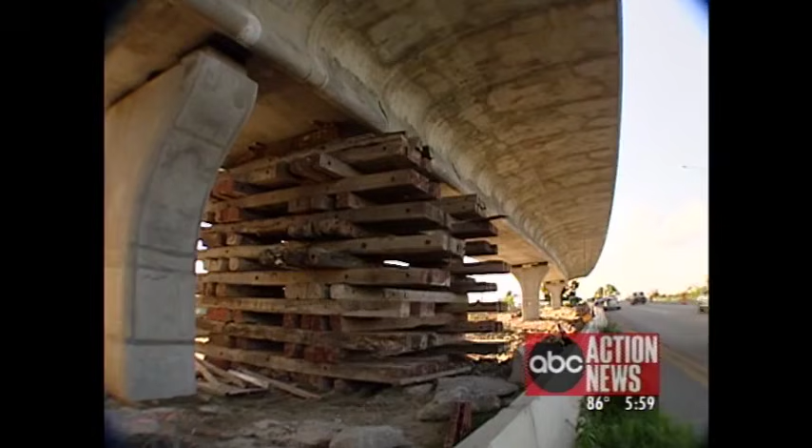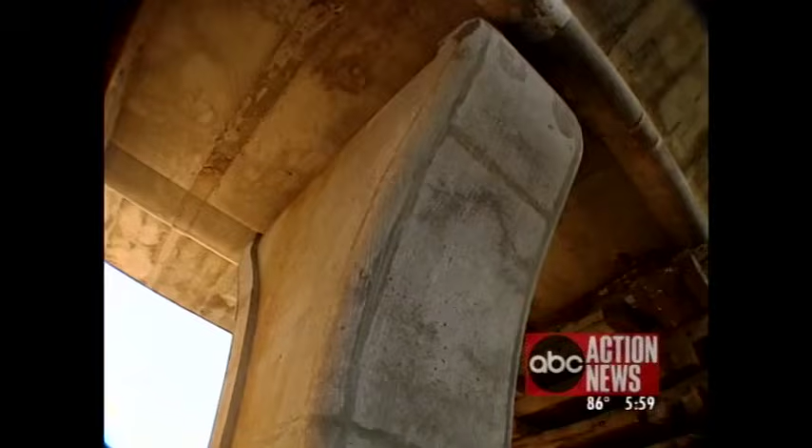Pier number 4 is now the one being supported by wooden beams to keep it from sinking. Engineers say they are making emergency repairs because there's fear the foundation may fail. This pier is a long way from Pier 97, which sank 11 feet in April.

Today, after months of pointing fingers, every party involved in the project met in one room to discuss what to do next. Executive Director Pat McHugh sat quietly. His project is now under intense scrutiny by the Department of Transportation in Tallahassee. At today's meeting, it became crystal clear he's losing control. Whatever Pat McHugh does from here on out must first be approved by DOT's structural engineer, William Nickas. As soon as you give it to us, we should be also giving it to William Nickas.

The Expressway Authority has always blamed engineering firm URS for designing faulty foundations. We wanted to hear their side of the story. Senior Vice President Tom Logan came up from Boca Raton, and he promised to speak with us. That way we could let the public know their position. But then suddenly, Expressway officials called for a break, and then they called in their attorney, Steve Anderson. You can get something a lot more attractive than this.

Anderson told us we had to leave, claiming this meeting involved legal negotiations and was not a public meeting. He also told URS not to speak with us, so we can't tell you what they had to say about all of this. Can you just talk to us for a second? I've been asked not to, and it's per our contract with the client, and that's the agreement we have, and I have to have their permission. I don't have permission to discuss it with you.

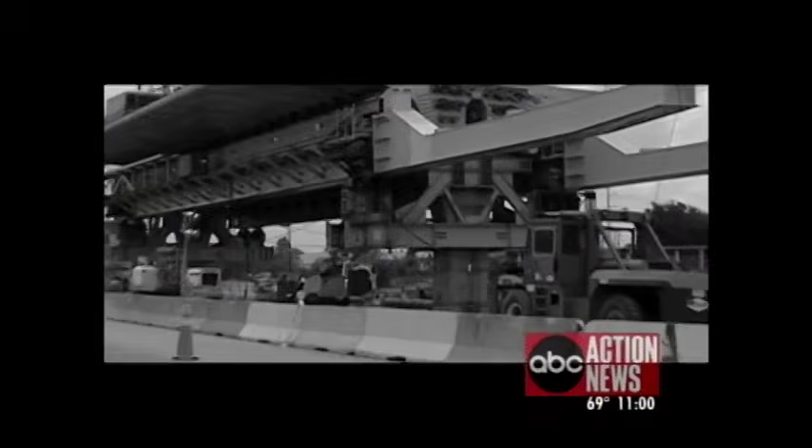If you thought the problems on the Crosstown Expressway were already huge, just wait until you see what our investigators have uncovered this time. Sinking piers are just the beginning. It gets much worse. Investigator Mike Deeson broke this story and exposed the mistakes on the project. And Mike, it seems the more you dig, the more you find out.

Yeah, and Brendan, this is probably the most serious investigation we've done yet on the Crosstown Expressway. We've talked a lot about piers and faulty foundations, but tonight we're investigating the elevated expressway portion of the Crosstown. We found parts of the bridge built with bad concrete, official documents altered, some missing altogether, and now one whistleblower says he was told to cover up mistakes.

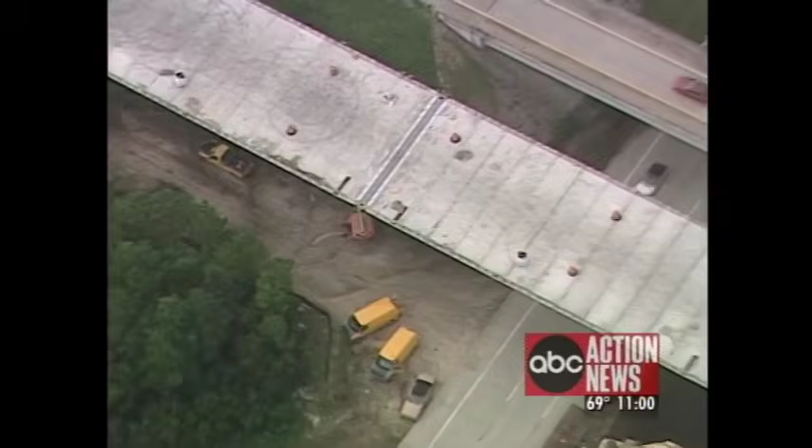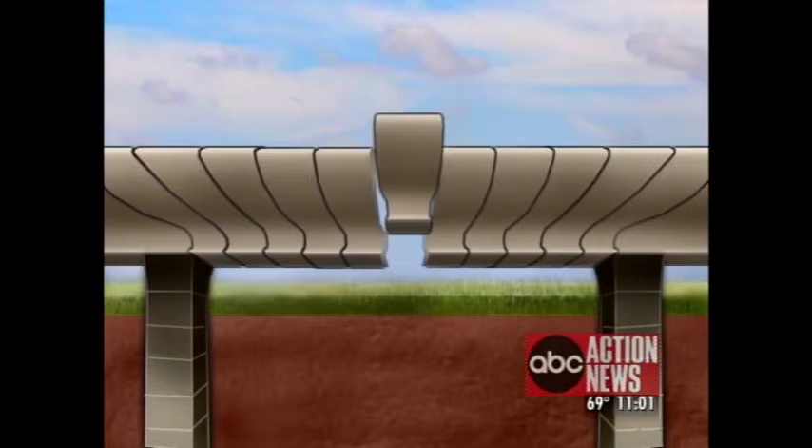This man, who we'll call John, was hired by construction firm PCL to work on the section of bridge that crosses over I-75 in Brandon. It's an area considered free of problems until now. John was in charge of building concrete supports in the very center of each span. That mid-span segment holds the bridge together and keeps the middle from collapsing. John became concerned after noticing holes forming throughout those critical mid-span segments.

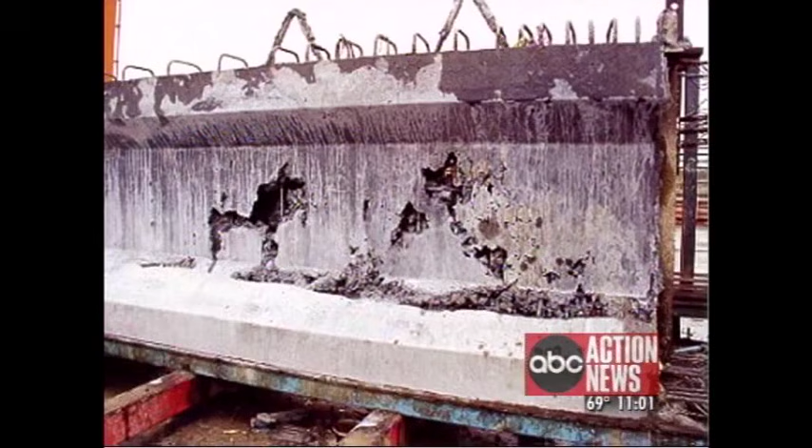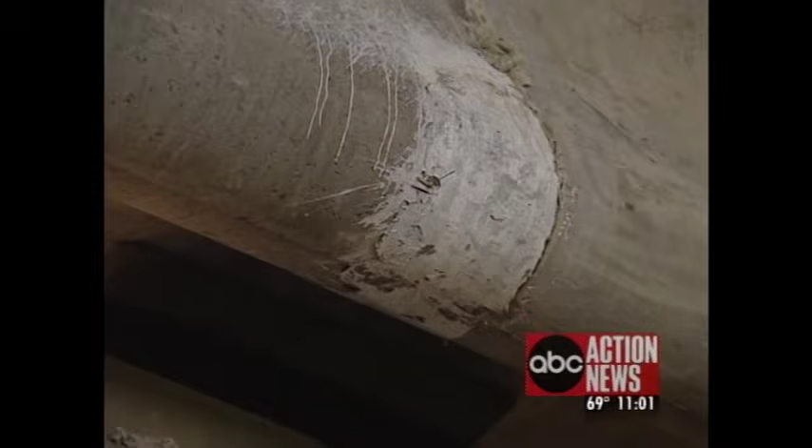What's the danger of having holes in the concrete? The danger is eventually the concrete is going to crack from all the pressure. John says the segment was riddled with small holes, creating a honeycomb effect like this one in the concrete. The holes were only visible from inside the bridge's tunnel, but inspectors would eventually find them. John says his PCL supervisor ordered him to cover the holes up with grout. Go into the tunnel, mix it up, and cover up the honeycombs. Cover it up before the inspectors got there, which will be at dawn.

What did you think when they told you to patch up the holes so the inspector couldn't see them? Heads will roll. Somebody's going to have to pay for this. John says he refused to do the cover-up job. A co-worker did it instead. This quick fix saved PCL time and money. Why?

So they wouldn't have to tear it apart and do it right. Is that safe? No, it's not safe. It's totally unsafe. Last August, we told PCL's Vice President, Jerry Harder, about John's accusations. Well, I can tell you that if anything like that happened with our forces and we were aware of it, we would dismiss employees like that, because if that's the case, that's not something we would tolerate.

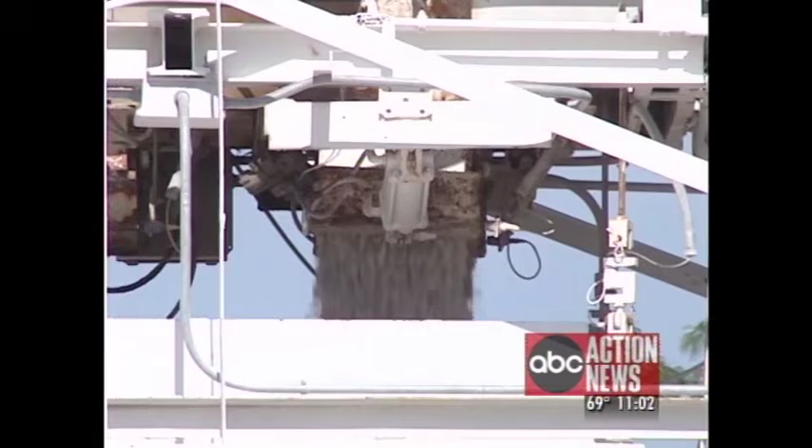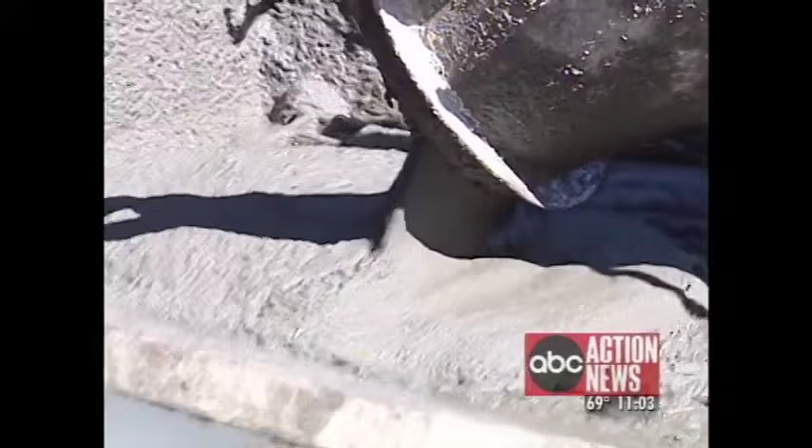John says much of the cement used for construction had been setting in trucks for so long, it began to form holes and crack. If they have to send the truck back, that's a loss. And they're trying to cover any losses that may incur on that project. Action News obtained records showing concrete used in the area above I-75 sat in a truck for 3 long hours before being poured. Experts tell us concrete must be poured within 90 minutes.

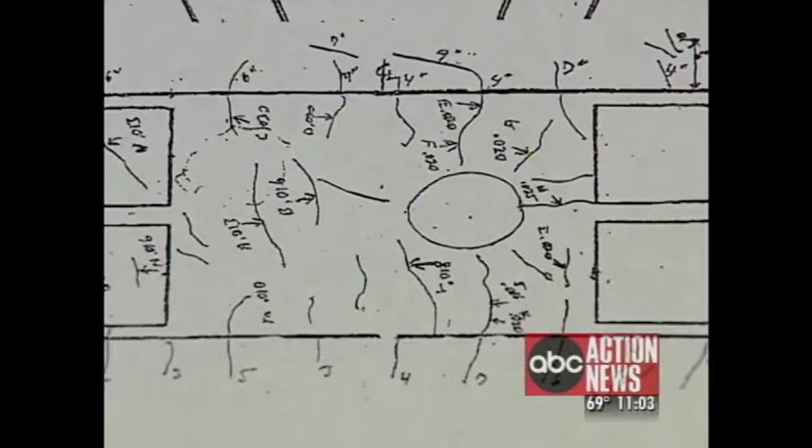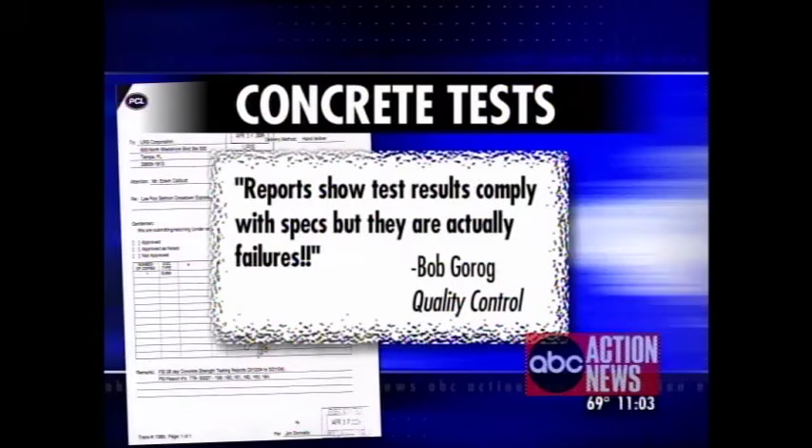Forensic engineer Bill Bracken has serious concerns. It would certainly reduce the durability. Depending upon the size of the hole, it could cause problems to the segment, given that it's under a tremendous amount of compression. After reviewing thousands of documents, we found these drawings showing excessive cracking along several piers. Last April, an independent quality control manager reviewed PCL's concrete reports. He discovered PCL had reported that piers were up to specs, when in fact, they were actually failures. They're covering up shoddy work.

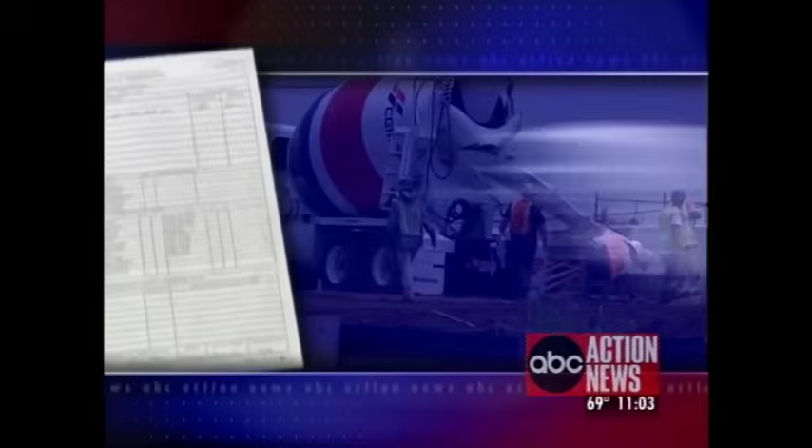Another inspector ordered a PCL superintendent to stop pouring bad concrete. But according to this report, the superintendent never discontinued the discharge of the concrete, even after he had been informed that the material did not meet requirements. That superintendent was fired, but Bracken still has concerns. You know, the fact that you have superintendents out there doing whatever they want, irrespective of what the inspector's telling them, makes you wonder what else happened.

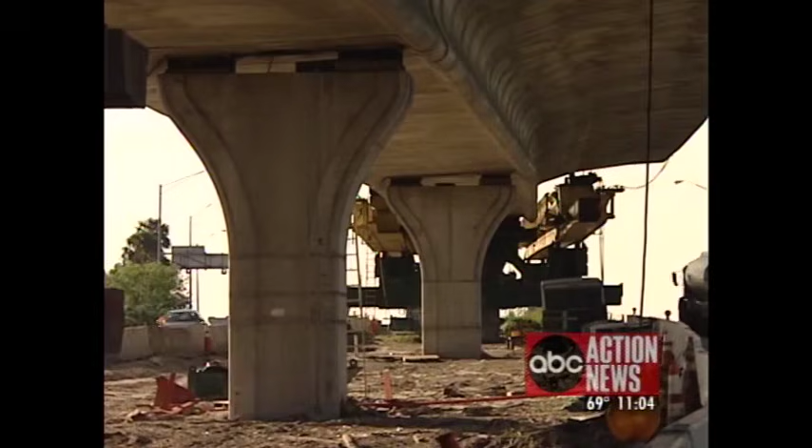Bridge designer FIGG Engineering is responsible for approving all changes and repairs on the project. FIGG employee Michelle Roddenberry approved many of those repair directives, but our investigation reveals Roddenberry was not a licensed professional engineer. Only a licensed engineer should issue a directive. And she's been issuing a lot. That needs to be looked at. According to Florida law, a person may not practice engineering unless the person is licensed. Roddenberry has been signing engineer reports since 2002, even though she did not earn an engineering license until 2004.

While reviewing Roddenberry's work, we discovered about a dozen repair directives missing, replaced instead with a sheet of paper saying the document does not exist. But we know at least 2 of those repair directives did exist at one time. After all, they were discussed during meetings. It's also of a tremendous concern that you've shown me correspondence indicating that this did exist, and then to request the records, to review the records, and find out that someone has inserted a slip of paper that says does not exist. What was it? Are they destroying documents? I don't know if it's destroyed. They sure didn't want you to see it.

And it gets worse. There's evidence that someone tampered with official documents. This report shows what type of concrete was used to build the bridge over I-75. Here's the original, and here's what the Expressway Authority gave us. Someone has altered the information. We presented our findings to the new leadership at the Expressway Authority, and they've promised to do a full investigation. But John says it won't matter to him unless the bridge is entirely rebuilt from the ground up. Are you going to drive your car on that expressway? No, I'll take a different route.